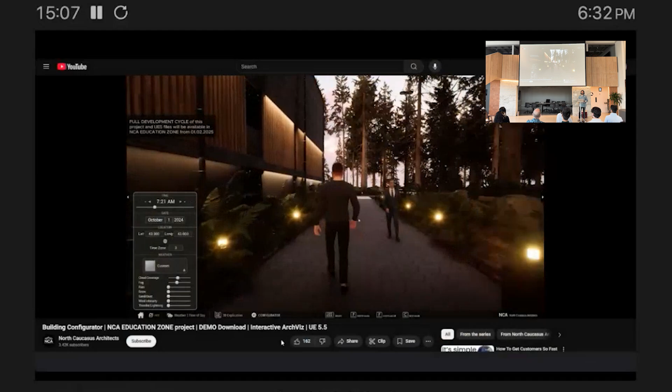Because from where I stand, this could be playable architecture. You can just build stairs and then go up and shoot, or you can create a home and live in it. Or it could be something like this, that you just change a material on a building you already designed and you have walkthroughs, you get to walk around and experience it, or just purely use it for visualization, making changes to time of day, interact with your building. That could be a game, but a very boring one.

But still, it's a game. You can do stuff.

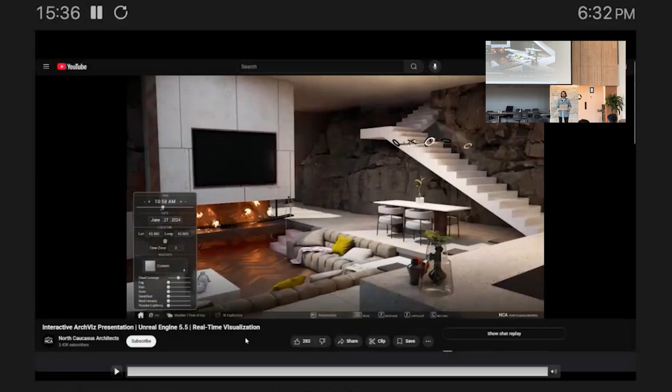Now, we face one issue as architects, and that is we have many models sitting in our computers that nobody knows about. They're just sitting there, they're alone, no one knows about them, no one can explore them. They've been done like 10 years ago. Even at your company, people don't know about them. They're just there. Revit knows about them, but that's about it.

Now, what's stopping us from just grabbing that model and importing it to Unreal Engine? We'll get to the Unreal Engine part, but import it there and hit play. Why can't we do that?

No game developer company has ever produced a model as detailed as the models we do. We think it through, it's an actual building. For them, it's just the representation of some space and you get to walk in it. But our buildings are actual buildings. How come we cannot just shoot it there and hit play? What's stopping us? There is something that's stopping us, and we'll get to it.

Well, first, there's a disconnect between our industry and the gaming industry, and that is, we speak different languages. Anyone who's ever played any video game knows that if you get close to a door and you hit E, it opens it. But that doesn't mean anything in architecture. But for gaming people, it means something. It means there's a mesh and there's a code attached to it. That's how they see it.

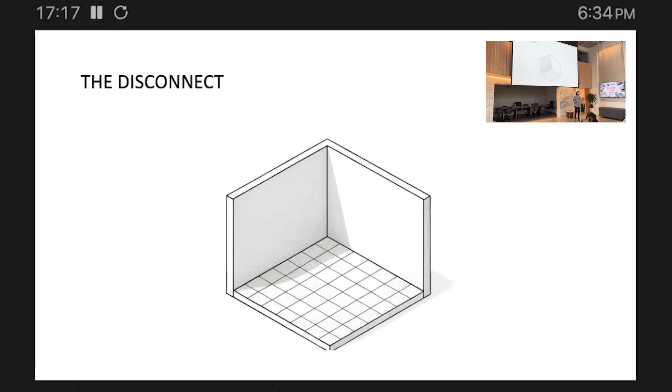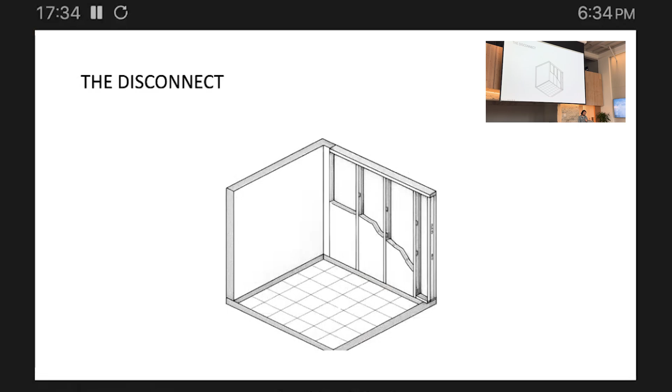For example, this corner of two walls and a floor. For us, this is what we see when we look at it. Well, what's inside it? The structure, the studs, the gypsum, whatever it is. We see it as it is, and it's going to be built. They see it as a mesh with a UV map on it that has a texture. That's how they see it.

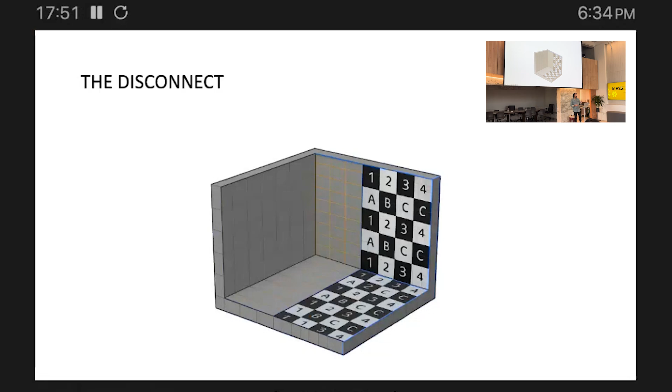So this is a big difference, and it starts to add up because, remember, I told you we have models that are super detailed? That's exactly why we cannot shoot them in. I'll show you why, but before that, I need to take a detour.

Let's talk about data a little bit. Data is just information for a computer, it's stored and read by computers. For us, for example, this, we see it and we're like, oh, it's a wall. What a computer sees, it's just code, especially if you're saving it as like an FBX mesh, it's just code. It's points in space that are connected to each other by faces. But you look at it, you have a meaning for it, you're like, this is a wall.

Now, there is another concept, metadata. That's data about data, because data has data. If you buy a book, there's a novel, but that novel has information. There's an author, there is the date it was published or whatever. So there is information about that novel.

Same goes for us. That wall, that's a point in space, comes with a bunch of information: the wall type, the material, the author. In this case, is Shervin. Shervin right here. But the point is that the computer also sees this.

So it creates a representation of the 3D object for you to be able to visualize it and for it to be able to store it. But it also attaches information to that information, that's metadata, that both has a meaning for us and for it, and it stores it. The point is that it stores it, especially with Revit, but you don't really have access to it unless you ask the question.

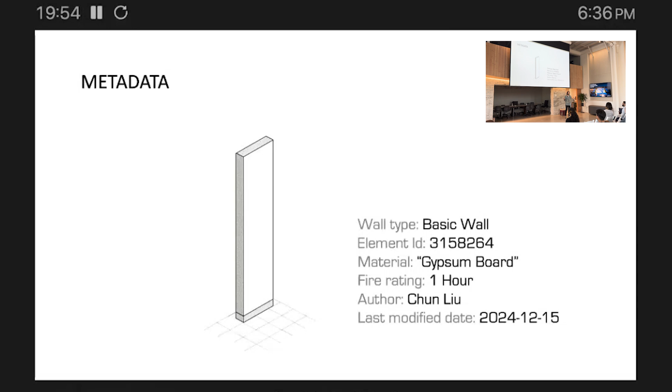If I ask Revit who made this wall, I can see who made it. But if I don't ask it, there's no way to know. So it's a Q&A type of deal.

That brings us to the next part, data extraction. How do we extract data from these softwares? Let's compare Rhino and Revit, since they're widely used in our industry.

Rhino treats everything as geometry. Anything you do is just geometry, and the geometry has colors, layers, information, but it's geometry. Revit doesn't do that. Take a door for example. For Rhino, a door is just a poly surface with a layer, a bunch of faces, materials, mesh count or whatever. It's just visual geometry information.

The same door, well not quite the same door, but a door in Revit has everything except visual information. I mean it does have visual information, but when you ask Revit what is this door, it doesn't tell you it's a mesh with this many triangles. No, it tells you who made it, who's the vendor, what's the category, the model family, how much it costs, what's the material, and a bunch of other things. A lot of information, and we all use this information.

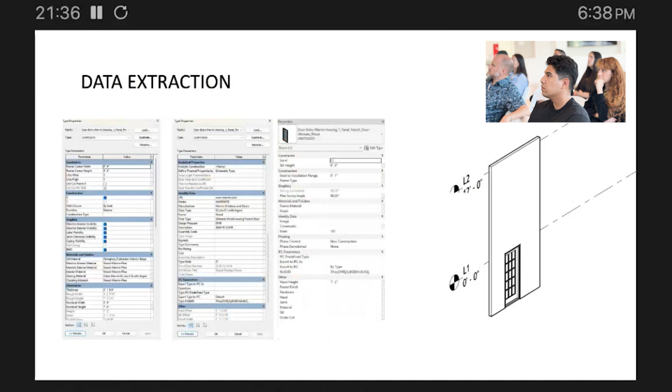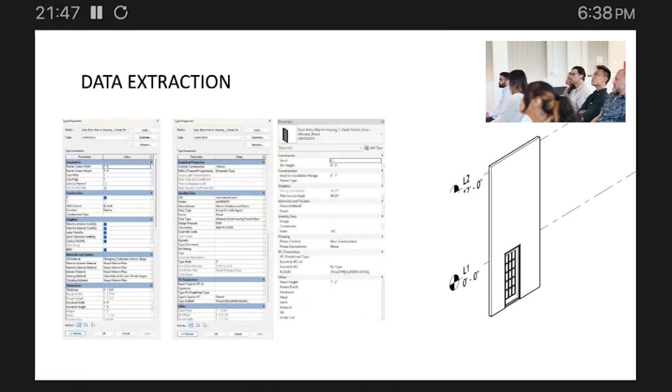Your team is using this information. Your interior model people, if you have interiors, use the type key to document everything, to make schedules, buy stuff, and show it to the client. But you don't know about it because you're not asking the question. You're asking something else, about the visual aspects, or if you're rendering, about the material. But there's information there that you're not seeing because you're not asking for it. It starts to make sense.

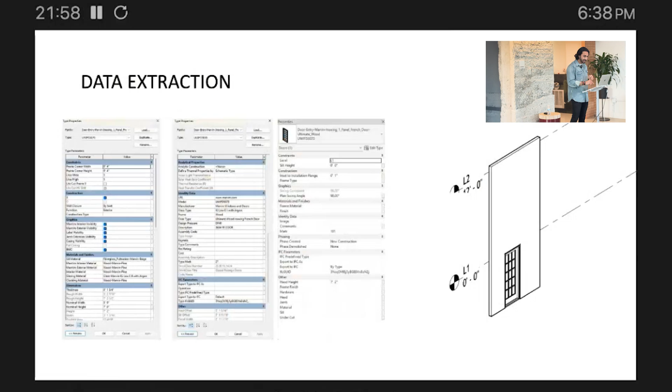This is just a project in Revit, visual aspects of it. If you've worked in Revit, you know this is the geometry, you explore it, it shows the geometry, saves the geometry, but it also saves the schedule. Whatever you want to put in the schedule, you can, and you'll have access to it.

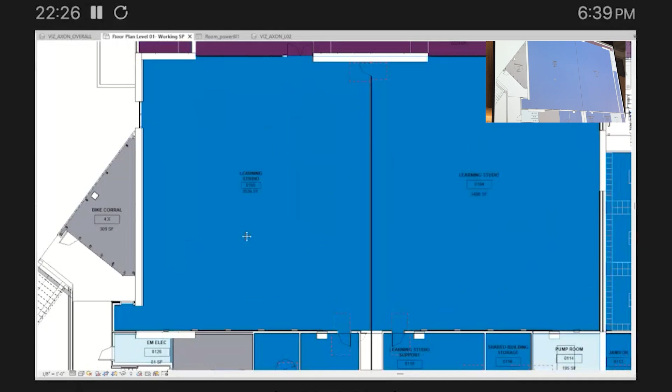For example, a room has a department, a square footage, a lot of information, but you don't really see that information, do you? It's stored somewhere, and if you print it out as the final product, you see it, but you don't have access to it.

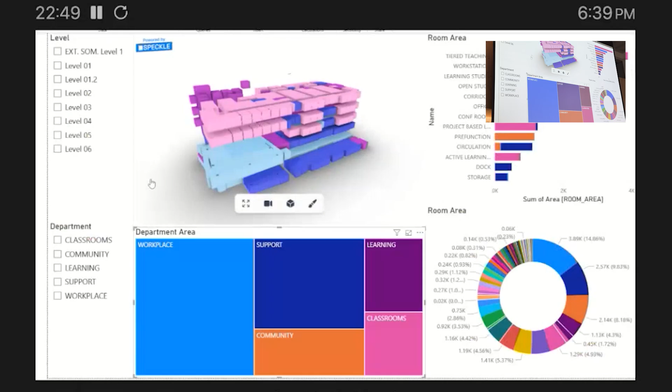Except if you export that information and use a software that reads that type of information, like in this case I brought it to Power BI. You get to see the information that you've been creating, your team has been creating, without knowing.

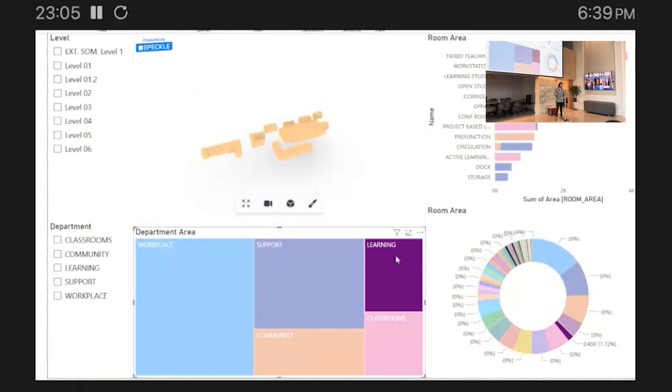I get to click on different parts of the building, different departments, different levels, and see what Revit has stored, how much square footage is in that department.

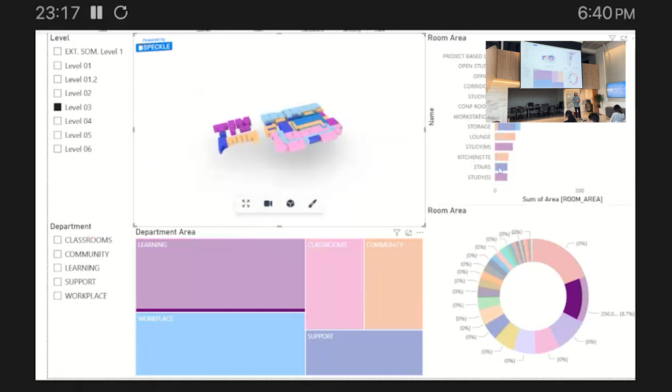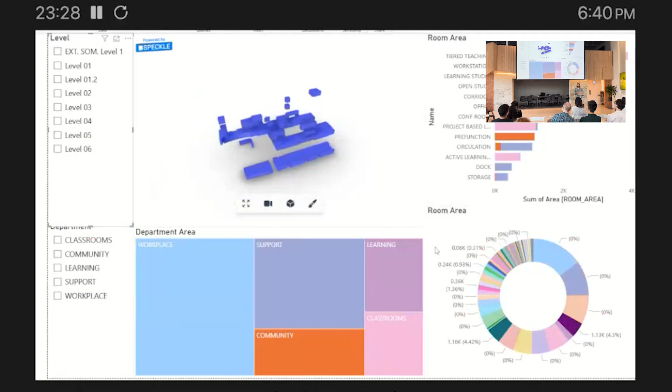Now why am I telling you all this? Because that might be the one thing that playable architecture can have that nothing else will have. If you just create a walkthrough and walk through a building, congratulations, you just built a very boring game that people are going to walk around in and you think they're going to admire your design. That's not how it works.

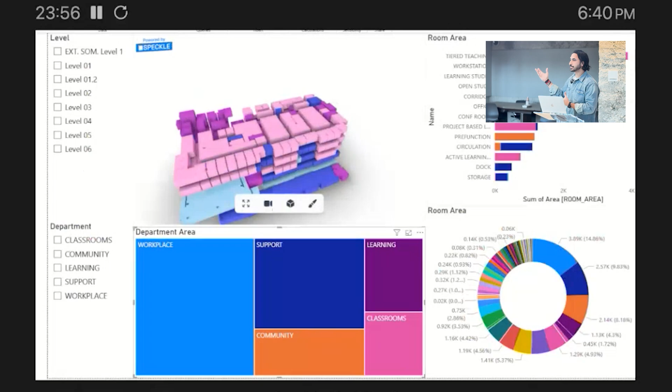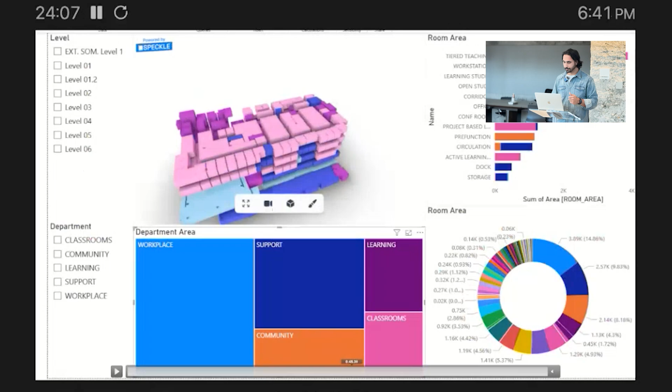If you want to represent the visual aspect of your building, you can just make renderings. You don't really need to do all this work. Why would I do this? What would justify all this work to make a game out of your design? It's information. It's extracting information. Now the detour ends here. We're going to get to the gaming part and what you came here for. Just have to create the foundation so we can talk about the same thing.

Let's compare the architecture industry with the gaming industry. If you've worked in any architecture software, you already know everything you need to know, it's just a different language. They use different terms for what we use. Location and rotation together mean transform - Unreal Engine calls it transform. Families or instances or blocks in terms of Rhino are all instances. Tiling in Revit is UV map, and so on.

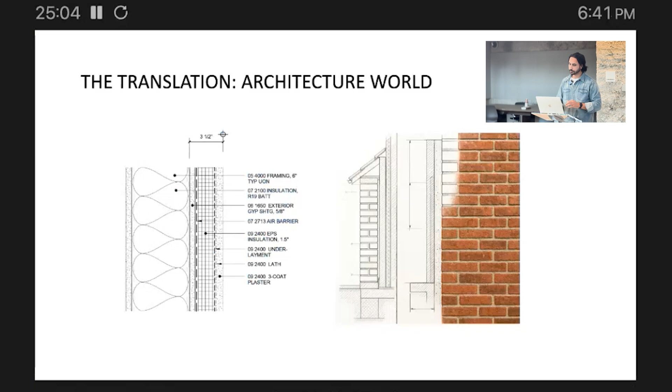We talked about this part - we look at the wall and see this, this is a wall to us. Game engines look at it and it has to be a clean mesh. It has to have UV, a texture map, normal map, reflection map for it to look good. That's all they care about.

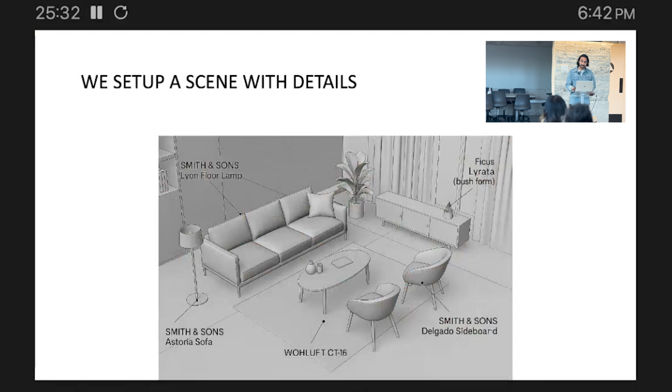Even when we work in 3D, when we look at this, we see a scene, a collection of elements - furniture, fixtures, specifications, vendors, details, pricing, material. What they see here is really just a bunch of meshes, texture maps, light sources, colliders. That's what they see, because that's what matters in the gaming world.

Why is it that they focus on these type of aspects of a scene? Because it's going to be more demanding. The more faces, the more mesh you have in your scene, the more demanding it is on your computer. It's not going to run smoothly.

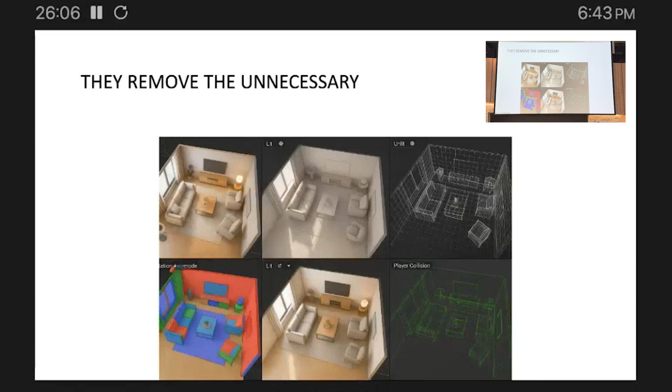For us, the final product is our sheets. We just give them to contractors or consultants and they build the building, or we build it. But for them, the final product is your experience, how you feel when you're in that building or environment. So they have to come up with methods instead of using a high number of meshes to get a smooth result. That's how they look at it.

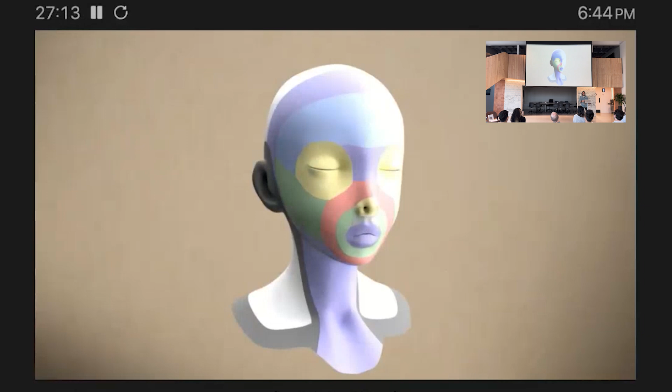For example, this shade smooth technique just renders it differently. It's the same object, but it renders differently. That's how they handle it. They lower the number of meshes while showing you the same product that you, as an architect, draw curves and stuff on. So they come up with techniques.

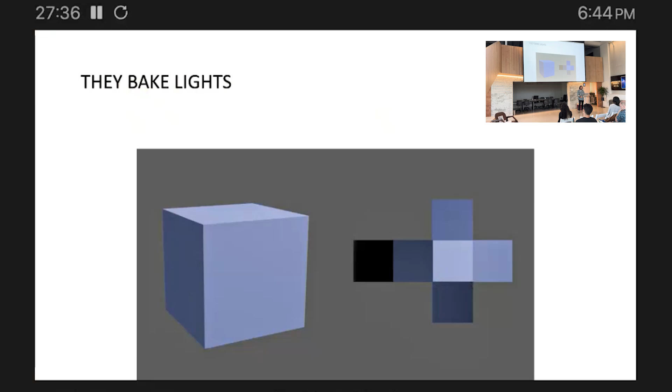They also bake lights. Baking light is essentially - I'm just going to read it off of here - baked lights means pre-calculating how lights and shadows fall on surfaces and saving that information as a texture. This way, the scene looks lit without needing real-time lighting, which makes it run faster. So all that being said, they optimize.

That's the difference. That's why you cannot bring your model into Unreal Engine and hit play, because your model is not optimized. You have structure, you have piping, you have screws in your furniture. That's just not going to work.

Well, that's not the only obstacle. There's one more obstacle: our work is always in progress. You're changing your design up to the last minute. But fortunately, Unreal Engine solved that for us.

They came up with this plugin called Datasmith, which Unreal Engine 5 already comes with. It allows you to extract all the information and have a live link, and it's good. You can read about it later.

Now we have the models, we are going to optimize it. All we need to do is add context, because no one wants to walk around in a building without a context - that just doesn't look good. And we need to collaborate and have a live link, meaning you will not be able to do everything by yourself. You have to utilize everyone's work.

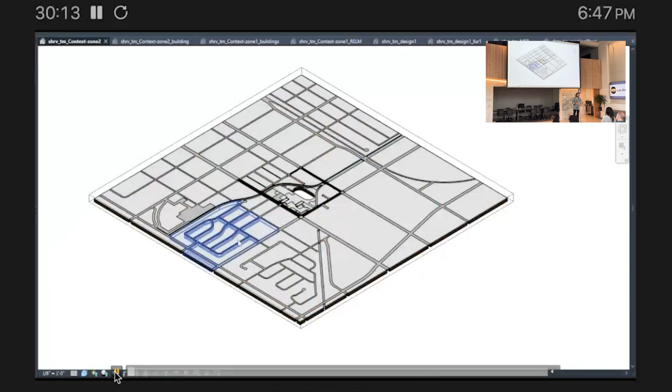I chopped up the file this way. You can do whatever makes sense to you - it doesn't have to be this, obviously - but the point is that you need to break it down into smaller pieces, put things that don't change separate from the things that change, so that you can lock them. You can even bake lights on them later on.

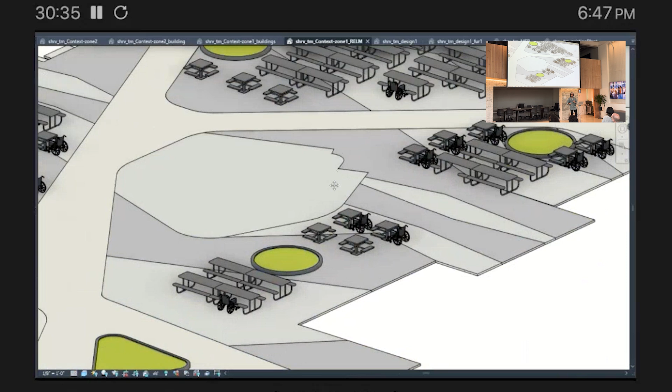Obviously, this is the building, and then the furniture - for me, I separate the furniture because the interior team is different. Well, in this case it wasn't, all of it is showing, actually. But then there's MEP, the trees. The trees are dummies, placeholders, because Unreal gives you the option to just replace everything at once, which is really cool.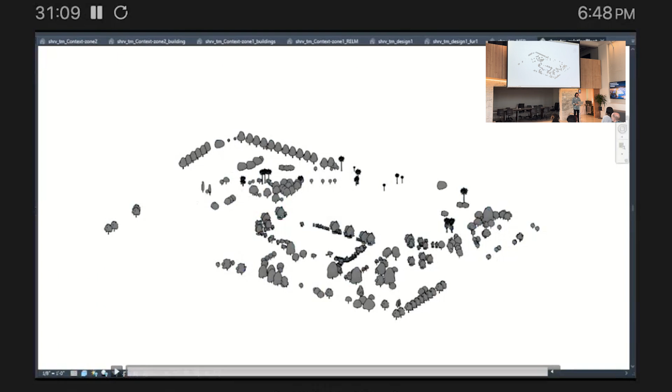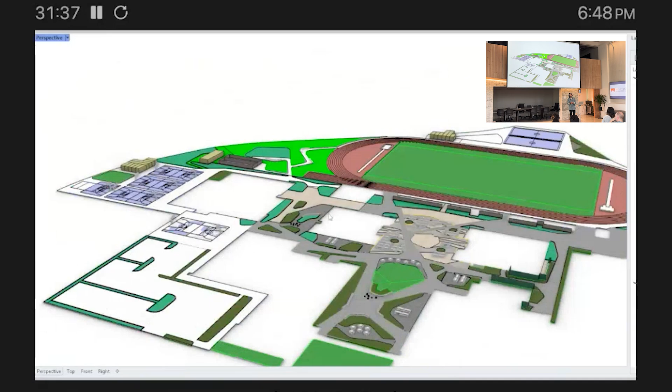So utilize everyone's work. Same project, we were working with a landscape architect, and they work in Rhino, and they also use Twinmotion, not Unreal Engine, but Twinmotion to render their file. Meaning they already put all the trees, landscape, grass, details, and materials there once. It wouldn't make sense for me to just go to Unreal and redo everything again. That's what I mean by trying to think this way. I'm going to utilize everyone's work as much as I can. I'm not going to redo it.

Fortunately for us, Twinmotion is just a kit of Unreal Engine, so you can just ingest that file. Whoever you're working with, if they are working in Twinmotion, they're giving you a gift of time, because you don't have to redo anything.

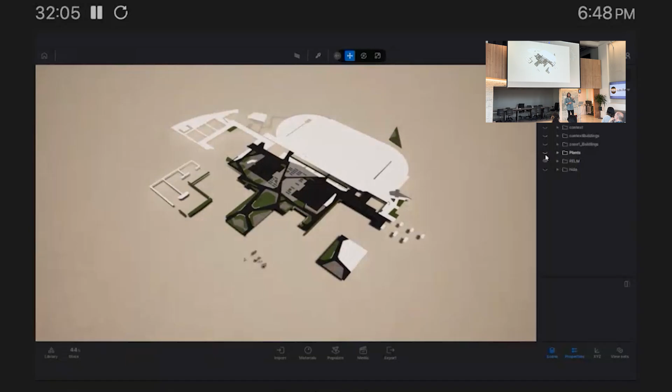Now, another part of it is context. Again, you don't have to do anything by yourself. This is a different project because for that one, we didn't really build a big context, but you can outsource your context because context exists. They can just look at Google Maps and create context for you. And if you outsource it to another country where you can get it cheaper, then you save time and money. You don't have to do everything yourself.

This way you get to have a high quality, high detail model that Unreal can ingest. Gaming people, game developers, are really good at doing this. They are very optimized too, because that's what they do, that's how they think. But this model is not actually that heavy.

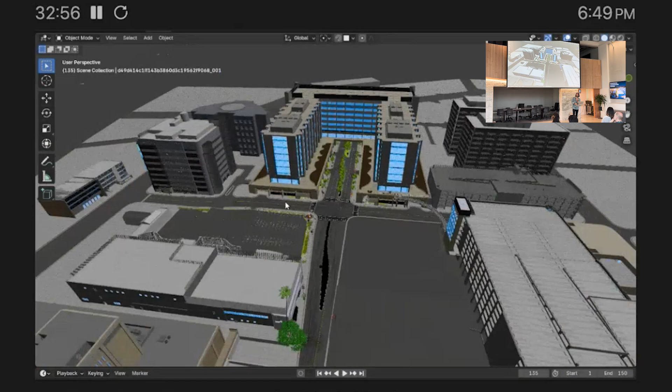Now, I don't really need to say this, I think everyone probably knows about it, but Unreal has a big library of materials, characters, cars, and players. Everything is ready for you to just hit import and run it. Some of it is paid, some of it is free, but the point is that if you know nothing about coding, you can still create a game for free, because a lot of these are free on their website or come built into Unreal Engine.

But in this case, you can just download one of their materials and keep changing the texture map to create your new materials, because the brain of it is already made by Unreal.

Now, let's get to Unreal itself. At first, you look at this and you're like, this is very overwhelming. It looks like an airplane cockpit. If you click on each window, each one has 10 other windows in it, and I don't know what to do, I don't know what to click. But it's very simple.

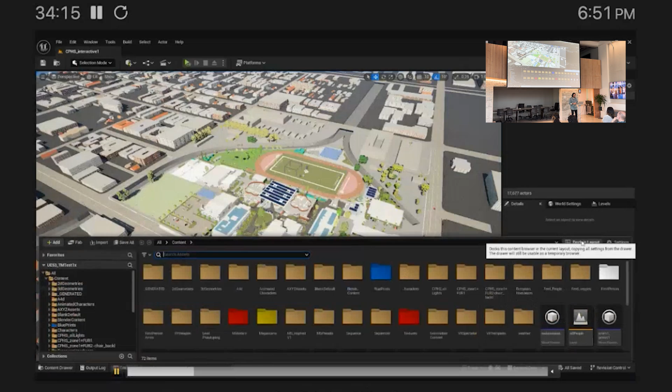The amount of knowledge you need to have to start working is simple. There's the content browser, and the content browser is just showing you the folder where you have Unreal Engine installed on your computer. It's the same folder. So anything you put in that folder is going to be reachable for your software, for your game. That's what it means—if you want something to be used, just put it in that folder.

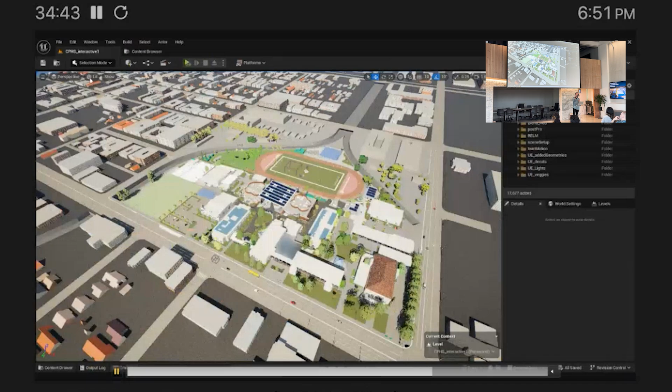And then you have this outliner here. That's everything in your scene. So what you really are doing is grabbing things from your content browser and putting them in your outliner so you can see them, because if it lives in the content browser, it's reachable, but it's not in your scene.

And then you have the standard different types of rendering, like wireframe, shaded, unlit, or whatever, and a bunch of other things. You can explore it on your own, but the point is that this first page is all you need to know. That's it.

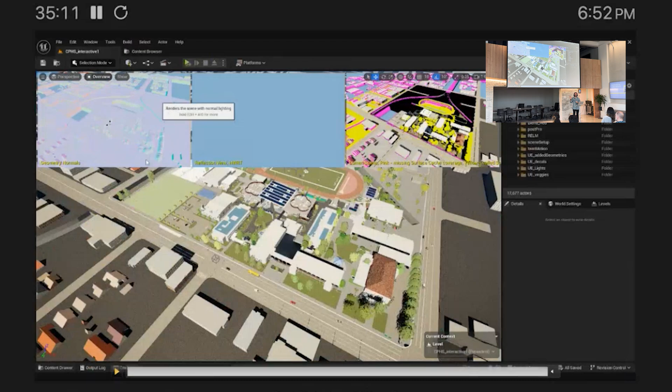Then you bring the file in, you need to manage your file. That's the second part. And Unreal has levels.

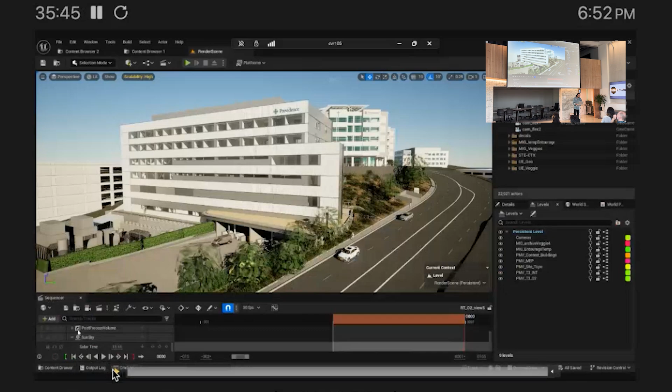Levels are used in the gaming industry for levels of games, so it loads another level whenever you finish one, right? But in architecture, we use it as layers. This way you can have your different options on different levels, and it gives you control to turn them on and off.

So you just bring everything in and put it on different layers, or levels in this case. That allows you to see what you need to see in each view, or not see it. You can animate it. You can have options.

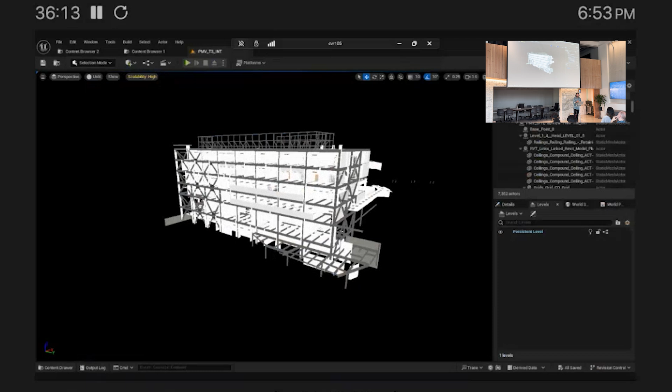And the way that works is, like, this is the interior level, and it's dark because there is no sun in this level. There's a master level that has all the sun, light, camera, and everything, and it loads all the other levels in it. So this level doesn't have a sun, so I cannot see it, but it allows me to just go in, make the changes, replace it. If it updates, update it, and then go back to my main scene and see what actually needs to be seen.

That's file management. And now, this part, I'm just opening doors for you—these are the questions that you need to ask Unreal.

These are the keywords that you need to look for when you start your first project, the things you need to deal with. This is not a tutorial, this is too overwhelming to be a tutorial session in half an hour where you just start Unreal.

But you'll know there's not much you need to adjust for your scene to work. There's like 7 or 8 things. That's it, that's all you need to know. And your model starts working much faster than you imagine. That's why I included this part.

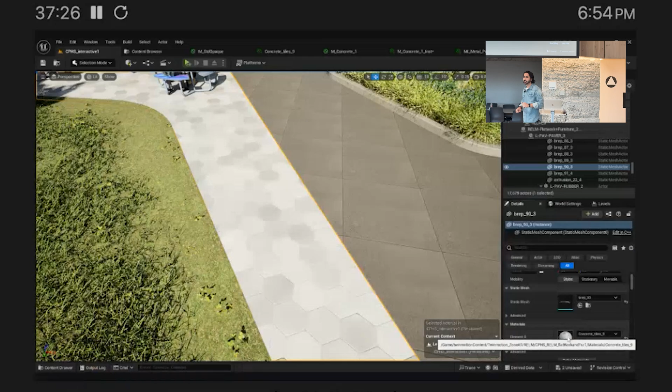Materials. There are 2 types: master material and material instance. That might be confusing, but material instance is what we as architects like. It shows you roughness and everything, and you can change it. Master material is this, the one everyone tries to avoid because it's shading.

You have to do grasshopper stuff for it to happen. But the good news is that part has already been done by so many people, you can just download one material, and this is what you'll be dealing with: normal, roughness changing, metallic changing, the things you're familiar with, because these materials already exist and someone has made it. The point is you don't have to do everything from scratch. It exists.

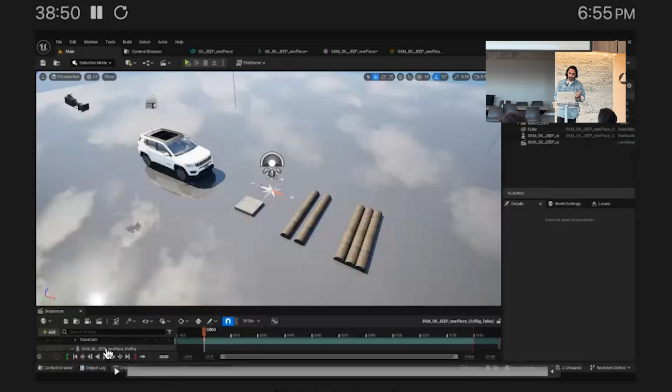One thing you need to know is Unreal Engine uses these terms: static mesh, skeletal mesh, control rig, blueprint class, and it's a bit confusing at first, but I'm going to open the door so you know which one is which when you start your first project. You don't need all of them, but based on your project, you can decide which to go for. So static mesh is just the mesh.

It just calls it static mesh. It's the object, like a car that comes with a bunch of things. Those are the materials on the car. Static mesh is just the geometry data, and as you can see all the materials here, I can just replace all the materials with whatever I want, and it will show up.

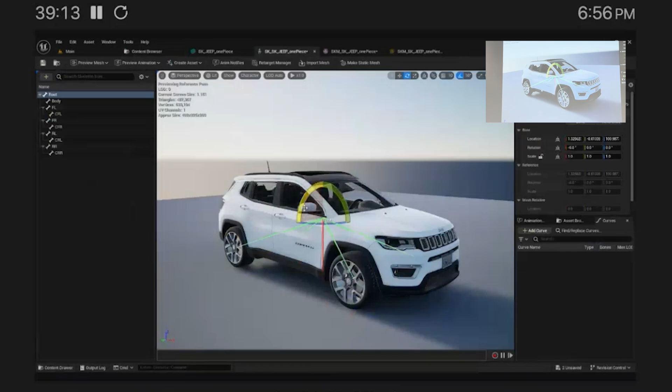And then there's the skeleton, meaning if you've ever done any animation, it connects the different parts of the mesh together as if it were our skeleton. It just binds them together.

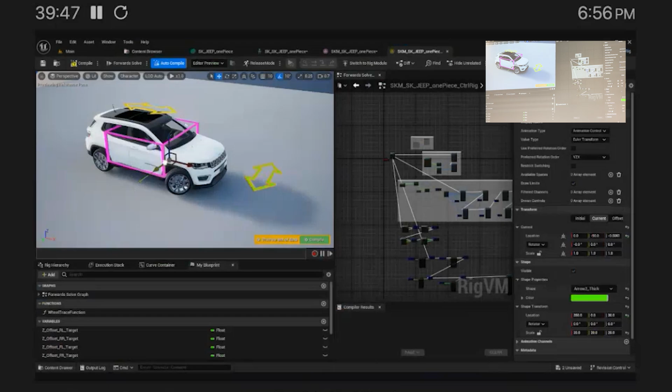And then control rig is the code that sits on the skeletal mesh and allows you to move it however you want. It allows you to code movement into the bone of your mesh. It allows me in this case to connect the wheels to this arrow, so whenever I move the arrow, the wheels move.

That matters because when you're trying to animate something like a car, wouldn't it be nice if you don't have to animate it, if it's just smart and responds to what's happening around it? That's the power of Unreal Engine. Instead of animating every little thing like any other software, it's just smart, it just does it. Instead of animating, you create a game and the game just has the physics of the world. Then you get to film part of it and make an animation if you want, which is the next part. The point is that having physics that work makes everything easier.

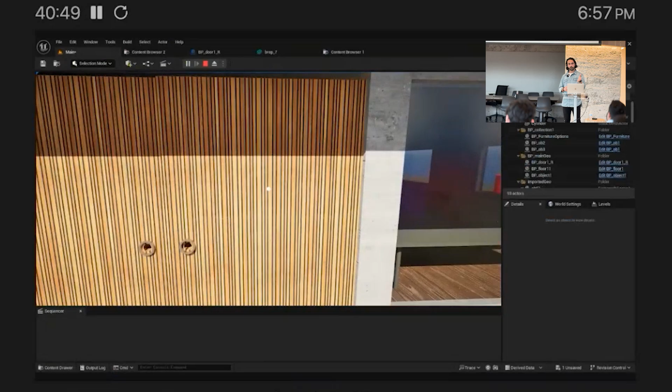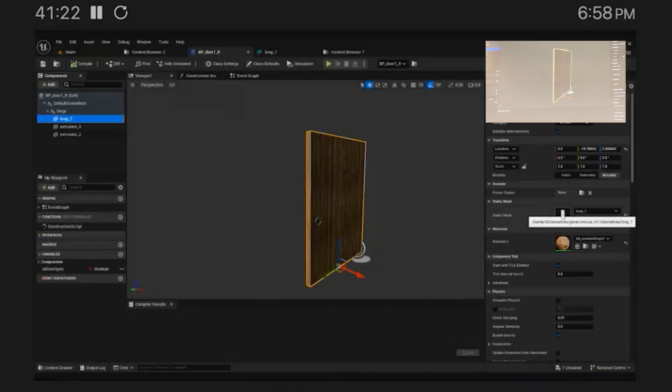The door on the right is a blueprint. Blueprint is code that's attached to your mesh, to your visual data. So when someone clicks on it, Unreal knows how to react because there's code, something that responds to your click. But it also has the static mesh data, it has the visual data.

That brings us to the next part, colliders. Another thing you need to know, mesh doesn't collide. Mesh doesn't mean anything, it's just visual information. The box on the left has a collider, the box on the right doesn't. It doesn't collide, it's very simple. If you don't put colliders on your objects, you cannot click on them, they don't collide with anything. They can just clash and nothing happens because it's not recognized as an object, it's just recognized as visual information.

Now, your collider doesn't even have to look like what you have. You can have a box and have a sphere collider on it and have it roll on the ground, which would be weird, but you can do that if you want.

Now, this is one of the most powerful tools that Unreal Engine gives you. It's called Nanite. You just need to know it exists. So sometimes you're rendering something and it doesn't look good, you don't know what to do - it's probably because of Nanite.

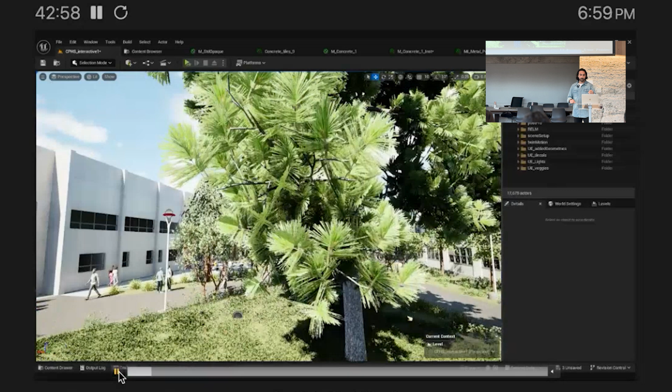Nanite only renders what matters to it in terms of optimization. So the tree, when you look at it from up close, it has details, all the leaves and everything, but the tree in the back doesn't have it. Why is that? They are the same - these two are the exact same tree.

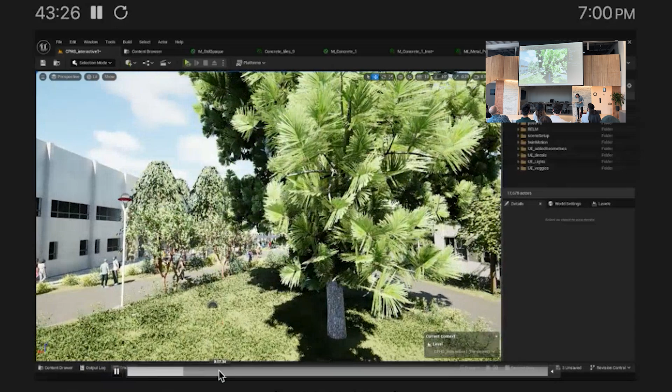But it's not moving, is it? Okay, there we go. The tree in the back - yeah, but as soon as I get close, it loads. That's Nanite.

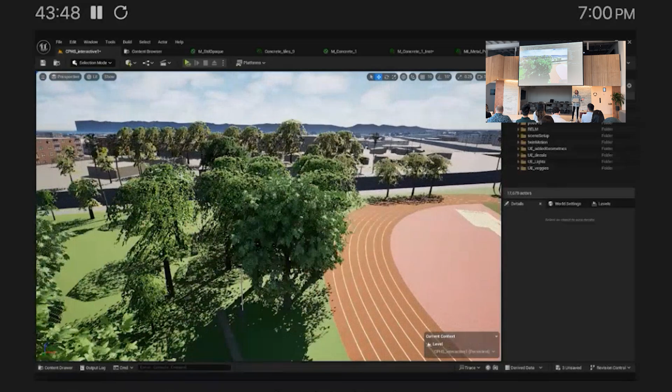Nanite only renders what you are seeing in your scene and is close enough that matters. It allows you to have a massive scene full of little objects without crashing. I told you you need to optimize to bring it in, because if you don't optimize, you're walking on that land, not on this tree. This tree doesn't matter, but the land you're walking on and the detail you're going to show your client - they matter, so you better optimize those. The things that don't matter, Unreal Engine will optimize for you. Don't worry about that part.

Now, imagine you create your scene, you set up everything, you optimize, and your scene exists in Unreal Engine. But now you want to make actual output. Before you even get to your game, you want to create renderings, videos, animations, whatever it is. You need sequences. Sequences, if you have worked with any other mesh software, it's just keyframes so that you can animate your camera, your objects, your colors, your materials.

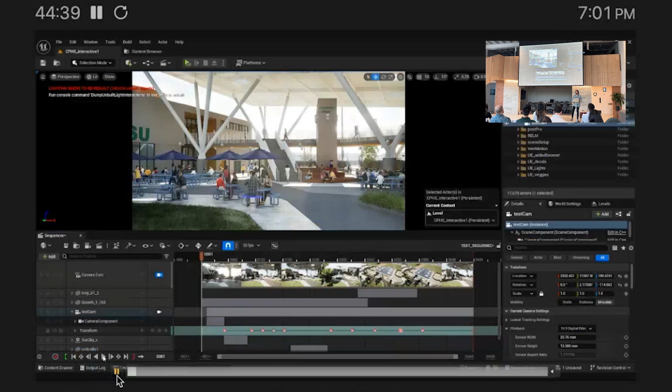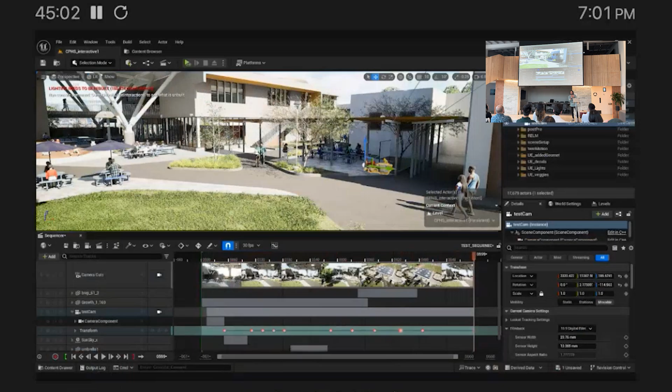The difference sequences have with keyframes is that you get to change properties of an object too. Like I can change the material of the sidewalk there. So I can go in and change almost everything about an object in an animated manner, so that I just click run and everything happens on its own. It could be movement, it could be properties. That allows you to create animations, right?

Or even, if you're a gamer, sometimes you're playing a game and then some demo happens - like the character starts walking and talking to other people. That's what it is, that's how they do it. Sequences.

The next part is game modes and characters and NPC characters and everything. Everybody knows what NPC is - non-player character.

There's actually a syndrome called NPC syndrome, do you know about it? Yeah. It means that everybody else is a non-player character except for me - I'm the main character, that's the syndrome. Which, in this case, is actually true - you're the only player, everybody else is just there to support you.

When you create a scene in Unreal Engine, you get to experience it however you like, because you get to change your player. I can play it as a third person called Lexi, or as a third person robot. It doesn't matter, I just change the avatar. The point is, when you create your game, you can experience it however you like.

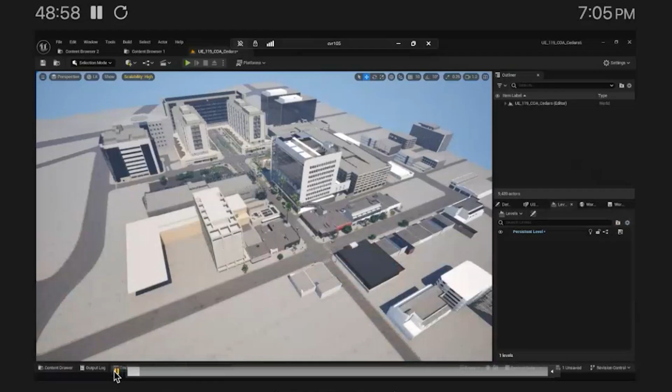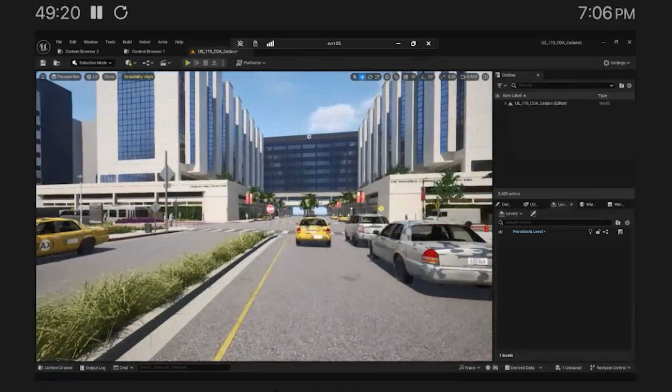Now, all of it is for us to create believable content. I'm just going to show you a walkthrough of the context that I outsourced and the building that's there. This is not out of the box. I had to apply materials and stuff on it, but I didn't spend as much time as you think, because most of it was done by putting everything together. It's just a matter of getting the right lighting and some material fixes for it to look pretty realistic.

And this is, you probably know what this is if you live in LA. Do you know where this is? No? Okay, yeah, it is.

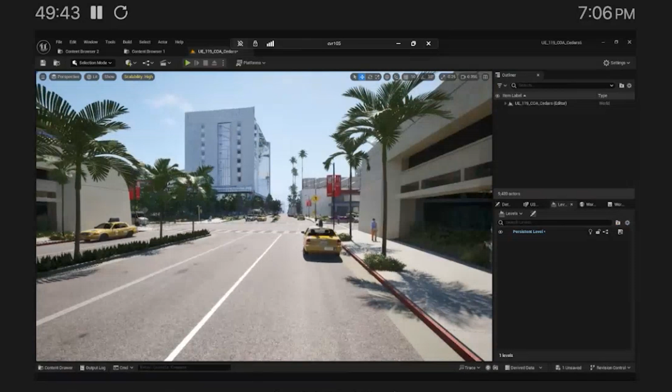Now, the result of everything that I showed you is in the next slides. And I'm going to be honest, I think I should have put more material on that part, but I had too many slides, so I deleted it. But I have a little bit, and you get to see how you can navigate the building that we made.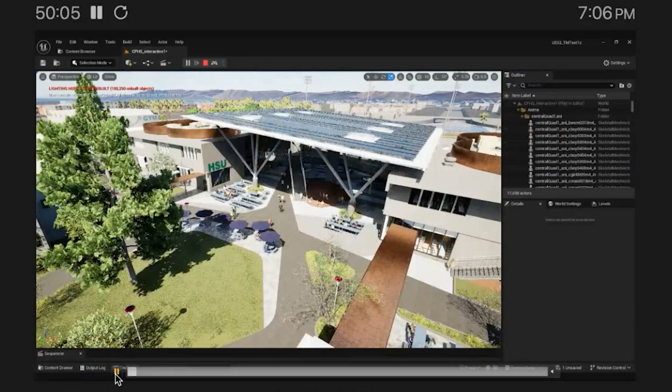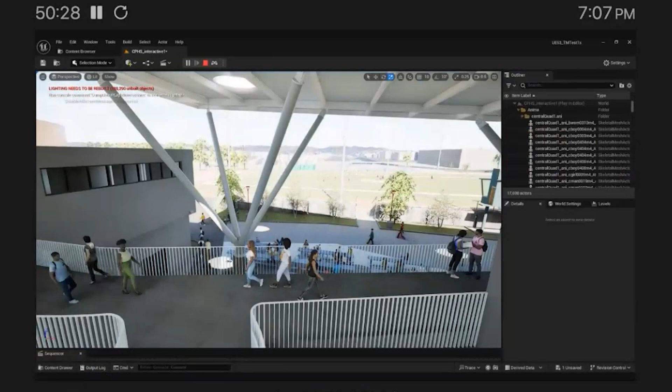You can, well, I'm running the game, so people are walking around and even reacting to each other because they're smart. And they don't even know I exist because I'm a camera. I'm just walking around. But it lets you create a believable working environment.

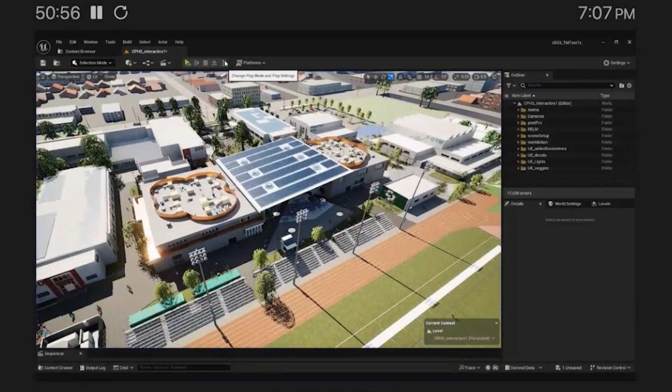This is a school, and everyone is doing their thing, walking around, playing on the field, and you get to capture moments of it. And you don't even need to animate it because your client or you can just walk around and see it happen in real time. Or I'm going to change the player to a first-person character that walks around and interacts with objects.

Yeah, like I can add an interface to change the time of day. Obviously, that's basic.

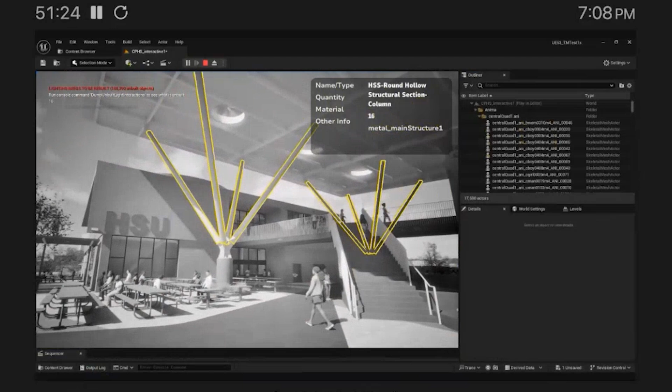But my favorite part, and the reason I took the detour, is this. I get to click on this column and see how many of it I have in my project, what's the material on it, what's it called, and you name it. Whatever it is that you want to extract, you can extract. I can click and show my client, oh, you want to know how many of these doors I have? Let me check, I click on it. Or they click on it. You can just send the file over.

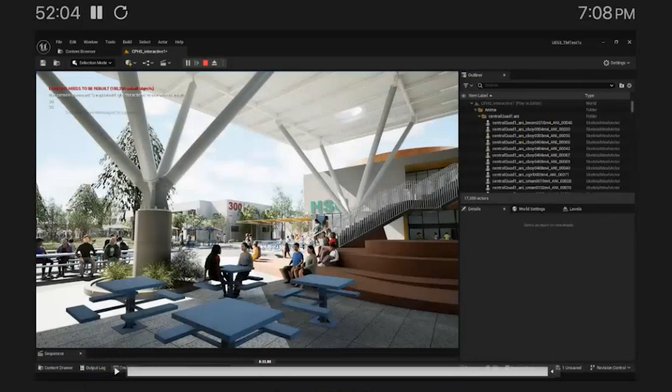I think what's important in this playable architecture is that the game that architects can create but nobody else can is this. I can extract information, actual information, and this might be even a building that's already built. All because of Datasmith that I told you, the plugin. It gets everything, it extracts everything from Revit. All the metadata that comes with one object, everything you can think of is here. So technically, you can create schedules here. I don't know if you want to do it in Unreal Engine, but you can. You can visualize it in a way that nothing else can, because it's just a realistic walkthrough. It's a game, it's much more relatable.

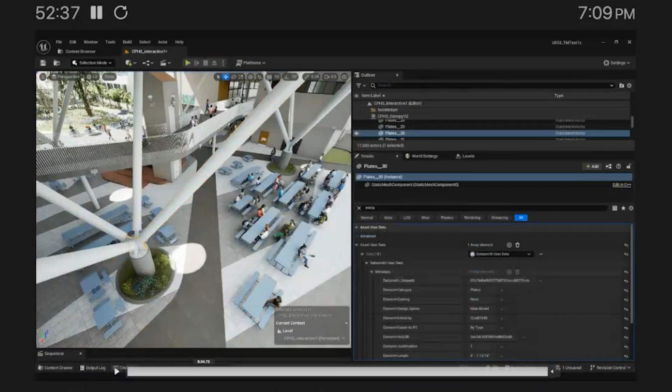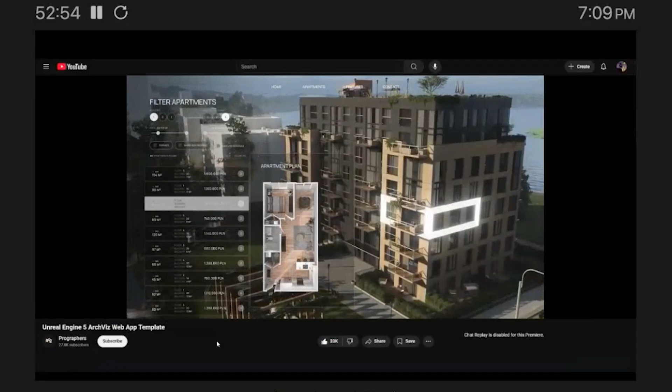And I found a bunch of examples online that make my examples look like gameplay, like kids' play, but I'm still going to show you because they're cool. Like this one is for real estate, and they created this so they can, I'm guessing, sell this building. So you can click and see the interiors, or go to the lobby and change the layout of the furniture in the lobby.

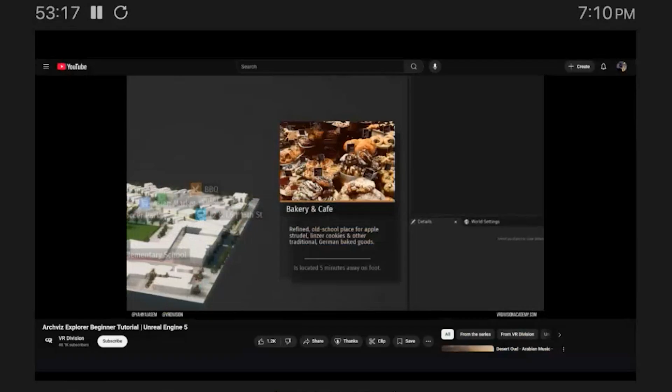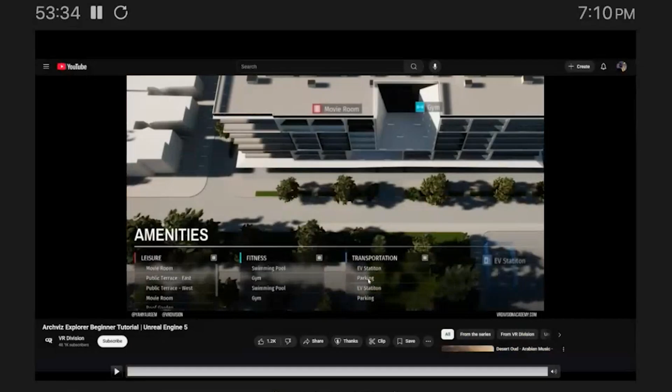And I believe there's another example, yes, this is like a city block that shows you what's in your proximity, like what do you have. It's being used to market, or it's a real estate tool for them, because these are buildings that are already built. You can see all the amenities and everything.

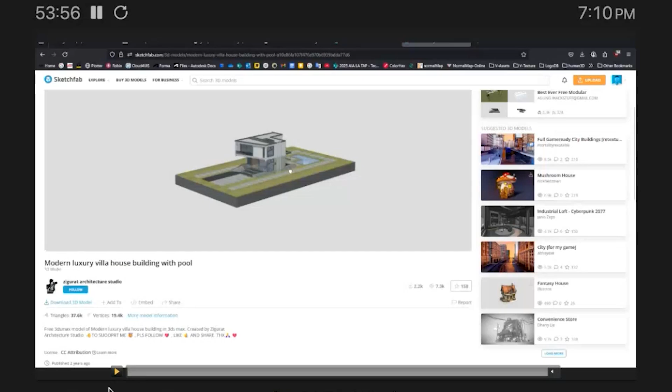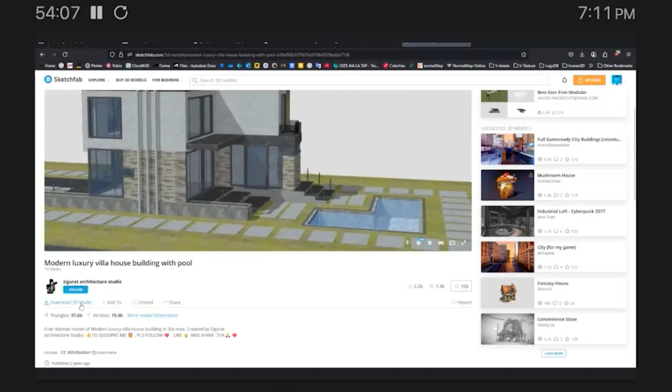Now, Unreal Engine to start is very overwhelming. But the good news is that you can start in Twinmotion and just shoot it into Unreal. Briefly talked about it in another slide, but this is a time lapse that shows you it's really fast and easy. This is Sketchfab, I just downloaded this model as a 3D model. And this is the amount of detail, and this is what it is. I just downloaded it as FBX, shot it to Twinmotion, and this is a time lapse. I'm not going to talk over it, but we can watch it together.

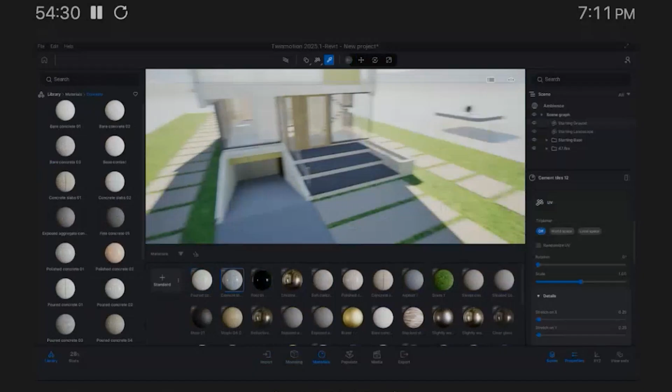Just applying materials. As you can see, everything is drag and drop. Twinmotion is very user-friendly. It was made exactly for architects who don't want to deal with Unreal Engine. It has a massive library of vegetation, cars, people, and everything. It's fairly easy and fast to create a believable scene and render it in ray tracing.

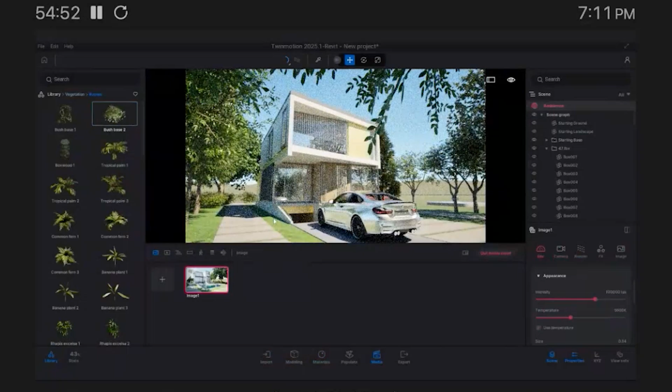Pretty good result. Now I just grabbed this file, exported it to a format Unreal Engine reads. You can look it up, and I just import it. At first, Unreal is loading all the textures, but once it loads, it becomes the exact same thing. Now, those trees in the back are nanites, that's why they don't look good.

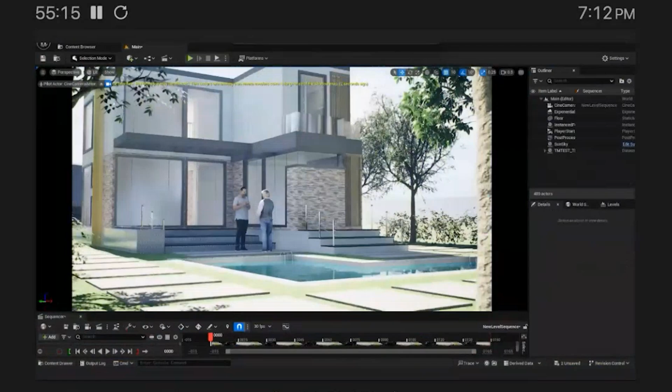But when you render it, it looks good. What I did in Unreal Engine was nothing. I just imported the Twinmotion file. That's what I did, meaning that if you don't want to deal with everything I talked about just now, you don't have to. You can create it in Twinmotion and bring it into Unreal.

You might ask, why would I bring it into Unreal if I already get that result in Twinmotion? Yeah, you don't have to, except you cannot make a game in Twinmotion. You can only visualize, only render animation. But if you want to interact, you bring it into Unreal, and on that scene you just add a player.

That's it, you walk around. You don't get to open the door yet because you didn't add the code to it, but once you do, which is not that hard, then you're good.

Yeah, you weren't supposed to see that one, but yeah, that's it.

It's time for questions that you might have. Oh, that's just for our recording, by the way. You're not gonna hear it louder, unless he speaks louder.

So the question is, how big are the files when you import it? So I have a Revit model, it's already big enough. So when I bring it into Unreal, is it even bigger than the Revit model, or can you still compress it somehow? What is the Unreal file size? Very big. If I need to show it to the client, probably you'd send it on a cloud.